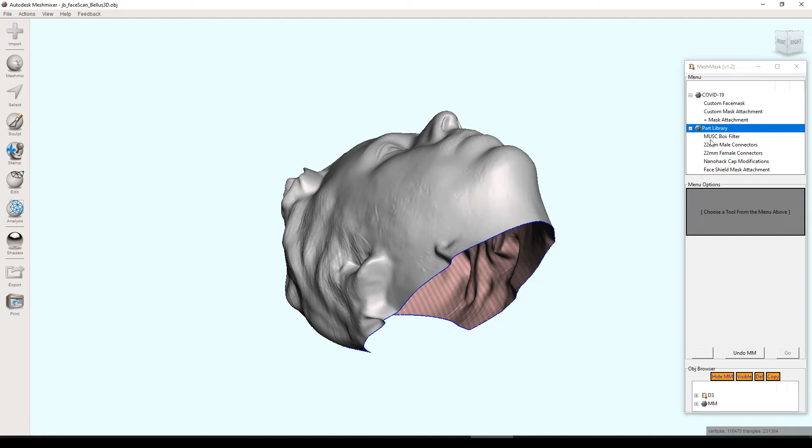For instance, MUSC, which I think is Medical University of South Carolina, released their own 3D printable filter design. Here's the PDF on it, which goes over how to put it all together, how it works, and why it works. I've also included that in the zip file. But when you're generating the mask, you only really need the attachment, you don't need all the other parts. So if you click on this, it will import the other parts.

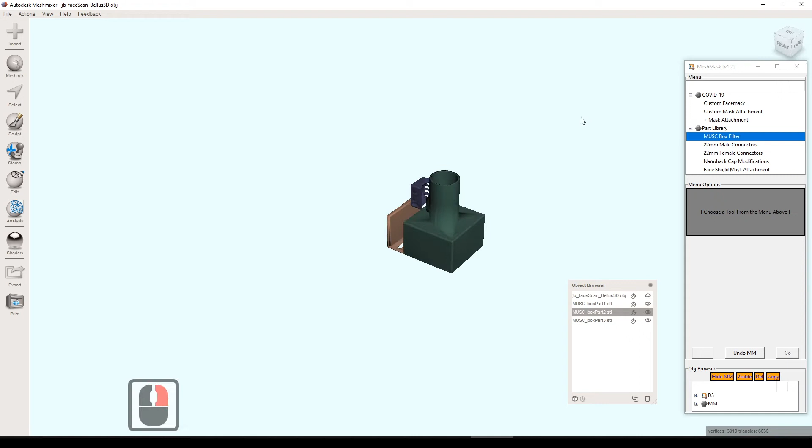So let's hide this guy. All the parts associated with the MUSC box filter, there are three of them, they all get imported, one, two, three, and you can print those out as well.

Same thing with, there was a request to add a 22 millimeter CPAP adapter, so we have male connectors. Let's hide these or get rid of them. If you click on the male connectors, it'll show you all the different male connectors included, and female, same thing.

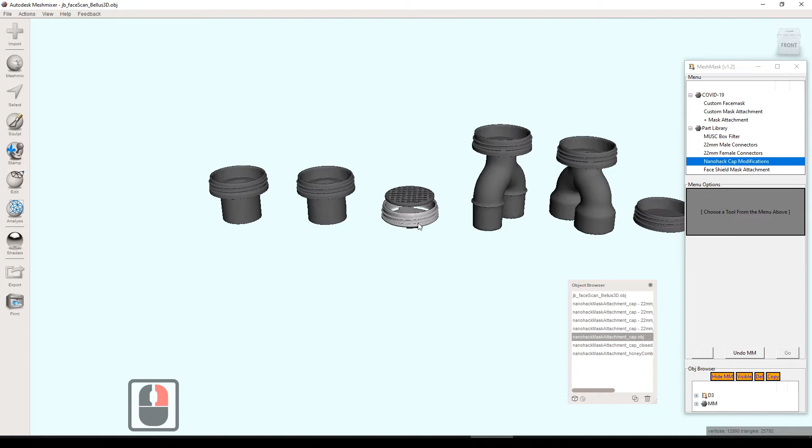NanoHack was the original one that was in the first version of Mesh Mask, but it only had... I think this is the original one right here. This came with a little honeycomb and it would screw into the mask. I got a little crazy with it, and thought that wasn't enough. So I realized quickly that this is fully modular and adaptable. It's got screws on it, it's threaded, so you can add anything you want to the opposite end of this threaded cap.

It's modular, you can add anything you want. So these are all the ones I just quickly hacked out here. Other than the original, there's a fully closed end cap, just in case you have multiple connections and maybe you thought you'd use one, but you're not. You can close that off with this end cap. This one has a little cutout for the MUSC box adapter.

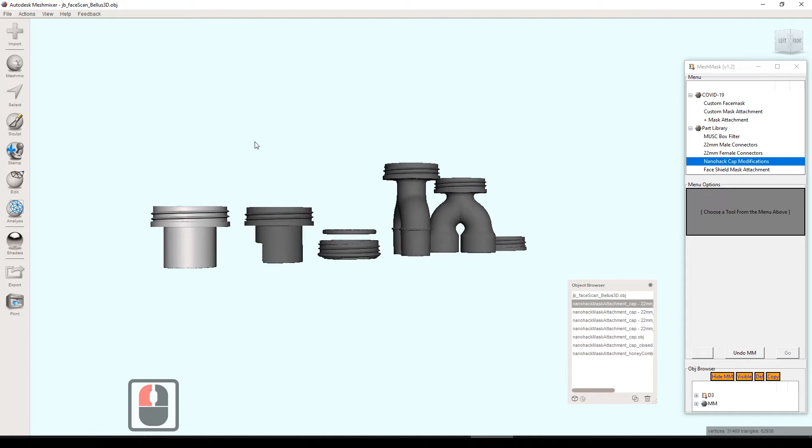That's just a regular 22 female. And that's basically it. At the end of when you're generating the tool, if you go up here to add mask attachment, and you chose the NanoHack, it would import all of these automatically at the very end, just to show all the things you could use with the filter you chose to add to your mask. These get added automatically at the end of the mask attachment tool, but you can also access them this way as well.

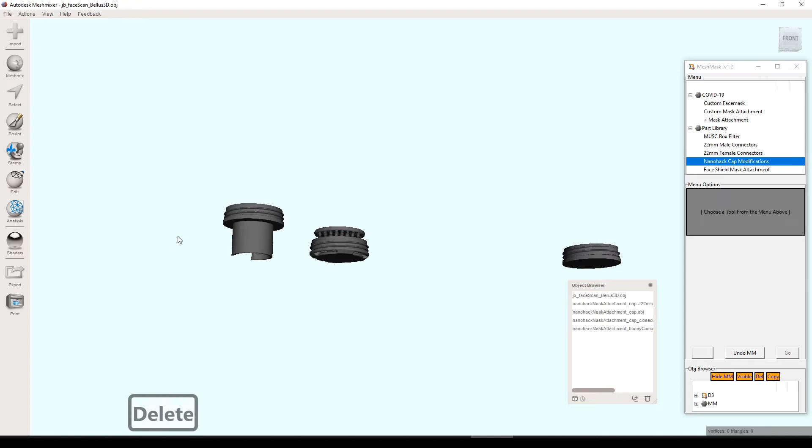At the end of when the tool is generated, you don't need all these, right? You're probably not going to use all of them. These are kind of silly, you may not need those, you can delete those. You may only need one of these, get rid of that. Then these are the ones that you 3D print. So it just includes all of them, and you can delete the ones you don't need and keep the ones that you do.

The last one is something I just made on my own. I saw there was a lot of talk about face shields and visors, and a lot of them go around your head, which is probably the more optimal solution. But I thought, why not give it a shot and include something that you can attach on the mask, doing it the reverse way, so the shield goes upwards from your mask instead of downwards from your forehead or head. I'll show how that works a little later, but for now that's what that does, and we'll get rid of that.

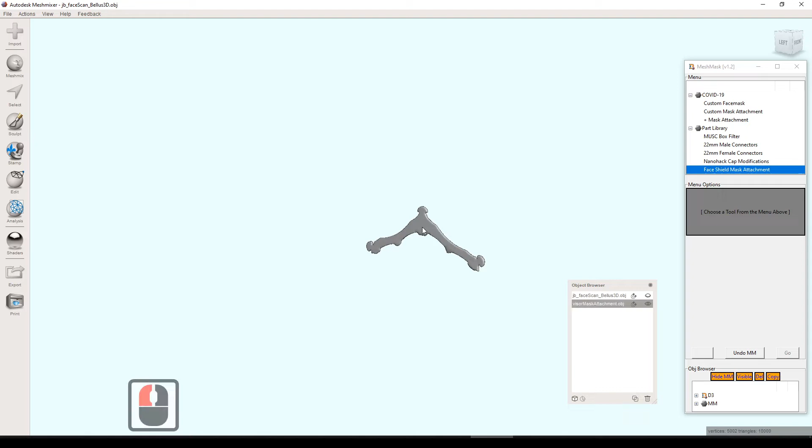We'll bring the scan back up and go back to custom face mask. This is the tool that will generate the custom face mask. Anything in this section are all tools, so any one you click on will generate some steps down here, and you iterate through them by hitting go, then next, next, next. Any directions for that particular step will be shown in this box. The first one we're doing is the custom face mask tool.

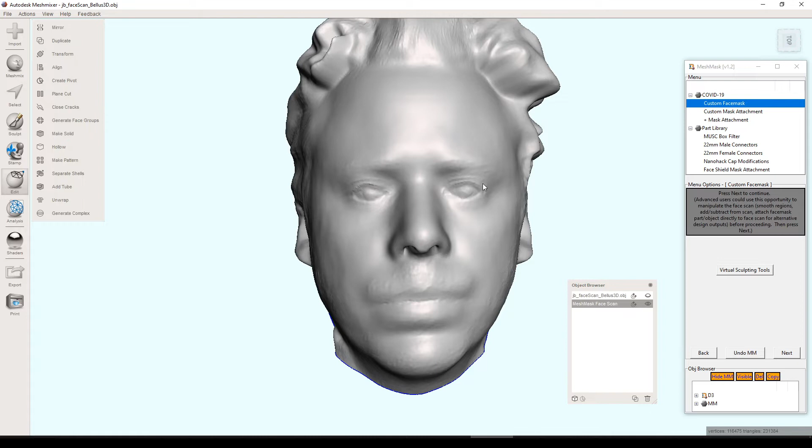The first thing is, if you want to make modifications to the face by sculpting, you can. It gives you a little brush to modify the scan if you want. I haven't really come up with reasons why I'd do that personally right now, but someone may, and just because I can't think of a reason, or I may not use it, doesn't mean I shouldn't have included it. There may be a case someone uses it for something, so I kept that step in. Most people won't, so you can just hit next.

The next series of steps is really just a bunch of waiting here, but the reality is it's normalizing any of the inputs it gets. So whether you took a scan with a Bellus, with a really fancy 3D scanner, or just with photogrammetry or a different piece of software on your phone, whatever you get, it will normalize that data into something this program can use consistently and generate a consistent output from.

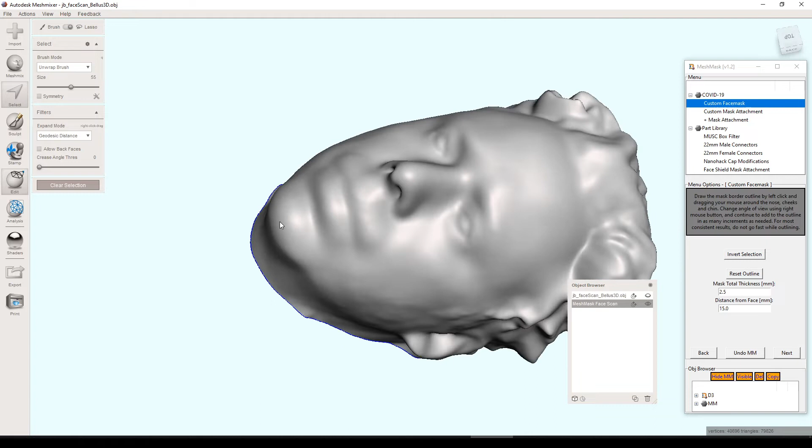Now it says draw the mask border, and the tool that's automatically selected allows you to just left click and draw on the face directly. You can continue the line, and if you mess up, let's say you came down here and you don't want to, you can come back here a little bit, re-click and drag, and it'll fix that.

In the prior video, I showed that you can change this to brush, and it gives you this kind of little circular brush that you can actually paint onto the face. I feel like this is a little bit better suited for what we're going to be doing, so I like to do that, but you could do either one.

The first thing is that I already 3D printed one of these masks, actually the one I did on the first video. It was pretty big and pretty bulky, and it's fine, it worked great, it fit nice, but it was a lot of material and a pretty long print, so for those reasons it's not really that practical.

What I learned right away is that these masks, if you're going to do it this way, they need to be as minimal as possible, so you don't use too much material, too much time, or waste too much money. That's one of the big benefits of using a 3D printer, you can generate these things fairly cheaply, so you want to keep it as small as possible.

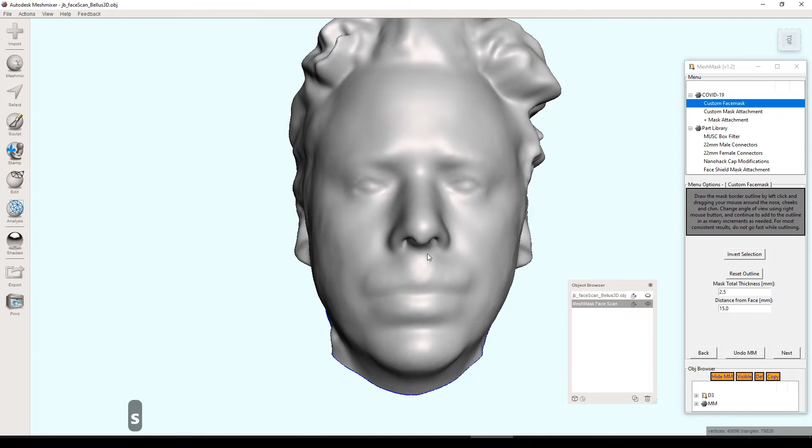What I like to do, my workflow for this, is only include at first what you absolutely need. The things I've determined you absolutely need are the nostrils, this part of the nose, and the mouth. So if I show you with my mouse, this area here is the mouth, and this area here is the nose, those are the absolute critical parts that need to be included.

So we'll start with the mouth, and I'm going to make this brush, this circle, a little bit bigger. You can come up here to the size and drag that up, or you can hit the open bracket key or the close bracket key, either one, and it will grow and shrink that for you. That's a little bit easier, and I like to do that.

I'm going to make it about the size of the mouth, just a little bit bigger, focusing on the mouth itself right now. That's too small, too small, too small. Getting there, almost right on, but we want a little bit of a buffer, maybe one buffer out, that will probably be good. I'm going to do one more just to be safe, focusing right on the mouth area. Click once.

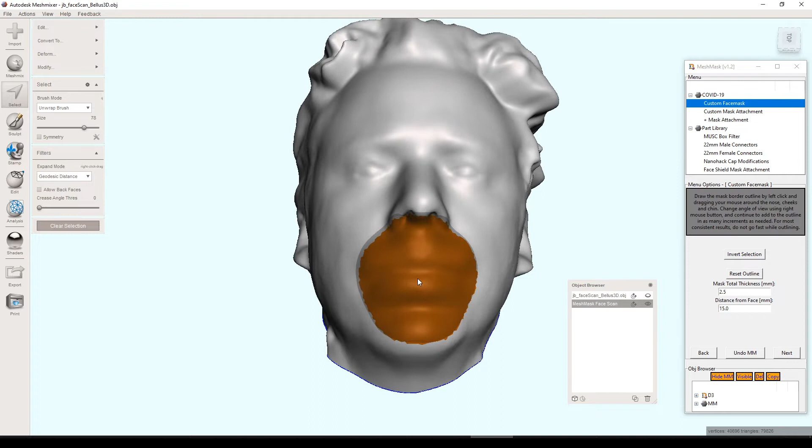Come up to the nose, and get my circle a little bit bigger there, and just get that first part of the nose that includes the nostrils, just that.

The other parts that I feel are important here, in order to maintain things, I feel like this may be good right here, but just to be safe, I feel it's good to add a little bit underneath the chin and a little bit on the bridge of the nose to get a little more mechanical retention on the face mask, so it's a little easier for it to stay on. So I'm going to do a little bit under the chin as well.

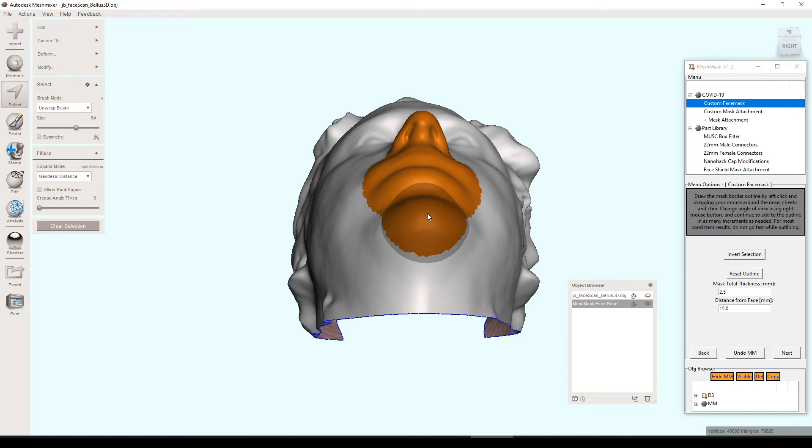Not too much, just enough, we don't want it on the jawbone, necessarily like right on the jawbone, so maybe the border is just a little bit underneath that. That might even be too much, but that's fine.

Then we'll come up to the bridge of the nose, and this is dependent on who this is for. This specifically for me is going to be for a dentist, and I know he has loupes on or glasses, so I can't have this right up too high because then he couldn't wear his loupes. Or you could make an attachment for the mask that has loupes built in somehow, but just using that as a consideration, I'm not going to bring this up that far.

Let's see, I'm going to shrink that down, and if you look at it from the side, I think that's a better way to judge things. Your glasses will typically rest maybe from right in the middle here, in this area, so I would say you want the mask to go in between maybe the midpoint here and the tip of the nose, somewhere in between there. So maybe right there.

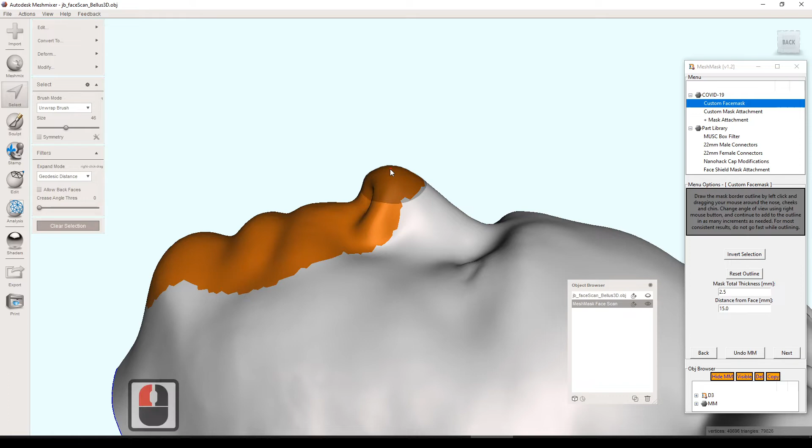The next thing is that you need to make sure that the outer side of the nostril is also selected. You want to make sure everything around it, a little buffer around the nostril as well, is included. When you exhale, your nostril flares out a little bit and needs some room to move around. So make sure the full border is selected with a little bit of a buffer.

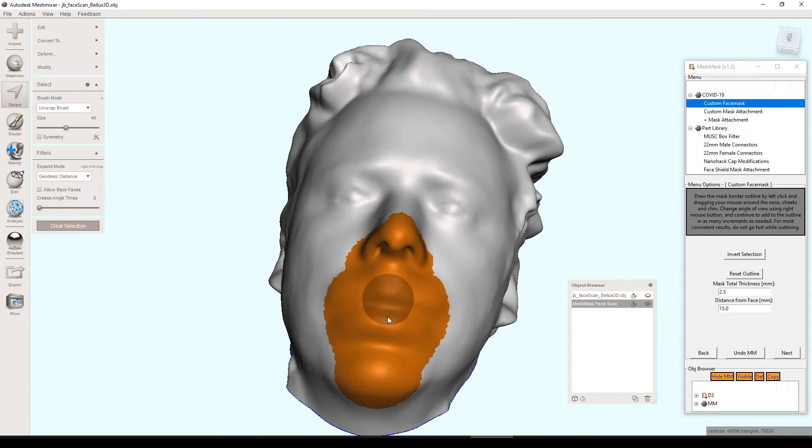Okay, now that we have the essentials selected, we can modify this a little bit. The first thing I saw is that this area here is kind of a crease in the face, and it's going to be moving around when you talk and move. So I need to make sure a little border outside of that is selected as well. That looks good on this side, and on this side that looks pretty good too, maybe just a touch there. Mouth looks good, nostrils look good, bridge of the nose looks good.

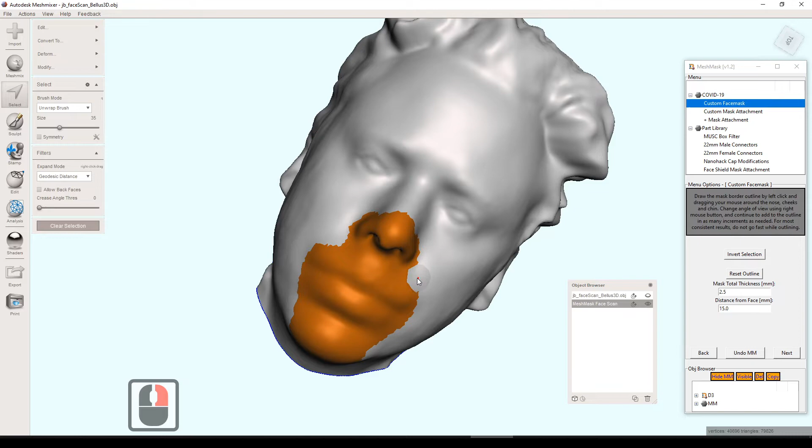I don't think I need this extra bit out here. Again, we're trying to minimize, so this is actually pretty important — each little bit that I'm removing here is saving me quite a bit of material in the end print. Buffer of the nostril, but minimizing a little bit of material. And then do I really need this part? Okay, it's looking efficient.

Then we come over here to our parameters. The total thickness of the mask, the end mask to be printed — I have the default value at 2.5 millimeters. I think that's a pretty solid thickness. Depending on what you're using, you can change that, but I'm going to keep it at 2.5.

Distance from face, the default value I had at 20 millimeters, but like I said, when I printed my first one out it was pretty bulky, pretty big, took quite a long time, and there was sufficient room in there — so 20 millimeters was a lot. I think 15 is a good spot to be at, and you can even go less. Again, we're trying to minimize as much as we can as far as material goes. For each millimeter or 2-3 millimeters extra that you add to the length, it's that much more material. So you want that perfect balance — enough room within the mask, but not too much material, or the mask may be too big to even print on your 3D printer. So 12.5, I'm going to give that a shot. I think that's good — 12.5, 15, anywhere in there is a good distance. This looks good, and I'm just going to hit next.

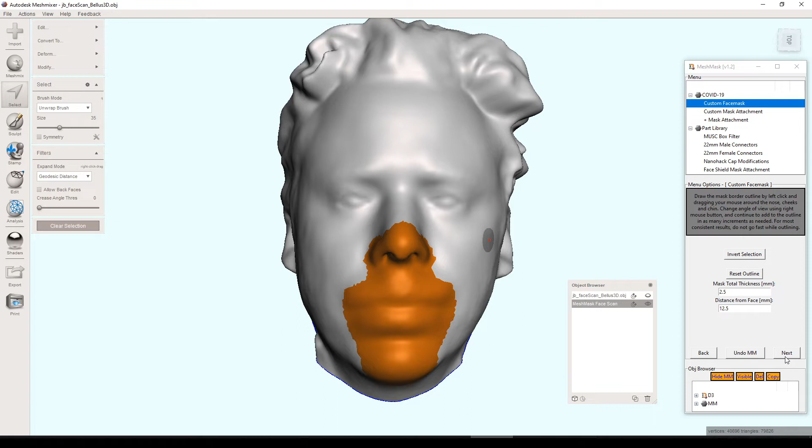This is a new step that I've added in this most recent release of the software. You are now able to add a gasket that goes around the border of the mask, which can either be fused to the mask so it's all one piece that you 3D print just like that, or you can make it removable as a separate 3D print. I did that just in case — what I'm personally going to do is use a flexible or softer material for that print and then attach it to the mask printed in a more solid material. So you can have it fused if you want, or check an option later that says to make it removable, and it will be a separate 3D print with an offset that's a good tolerance for snap-fit parts in 3D printing.

So we are going to include that gasket — we're going to check that box. We can make it whatever diameter we want. I haven't printed one of these out yet, so I'm not quite sure, but I'm going to do 6. I think that's a fair value — it looks good aesthetically in the software when it's done. I think anywhere between maybe 5 and 10 would probably be a good value, but I'm going to do 6. Hit next.

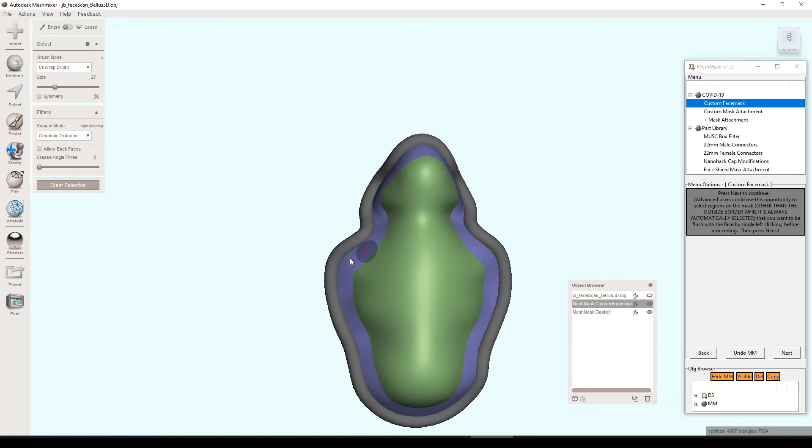This step says, and I'm actually going to pay a little bit more attention to this step. There's a lot of text here, but the reality is all it's asking you to do is select any other area other than this purple border that you want to be flush with the face.

So for me, this is going to be for a dentist. We already made enough room on the bridge of his nose for his loupes or glasses, but at the same time, this part of the mask will extrude upwards 12.5 millimeters. And if you did 15 or 20, that's quite the distance there, and if you're looking down at a patient, that may hinder your ability to see things properly.

So I'm actually going to try to reduce that a little bit, and I don't want that to extrude out and have that same 12.5 offset. I want it flush against the bridge of his nose.

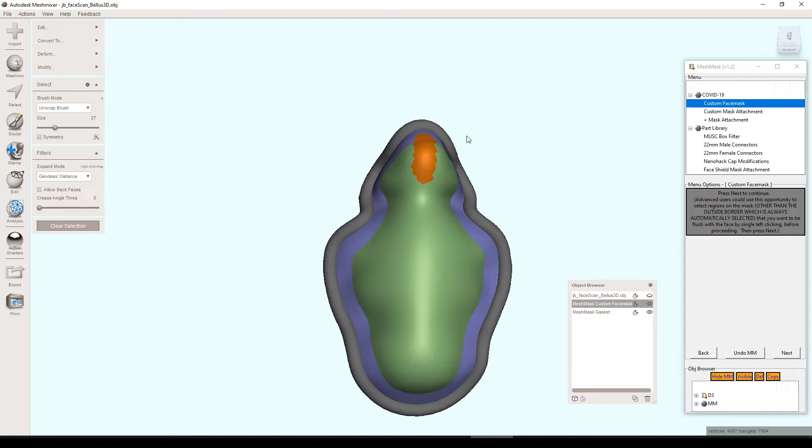But I can still see the nostrils here, the outline of the nostrils. What I do not want to do is include the nostrils in this, because that would mean it would be flush against the nostril with limited room to expand when you exhale and things like that. So I can still kind of make out where the nostril border is, so I'm just going to go right around that.

This helps with material, and it helps with vision as well. So I don't have to do any of this purple part because it's automatically selected, just anything in the green. And if it spills into the purple, it's fine. But let's make that a bit more symmetrical.

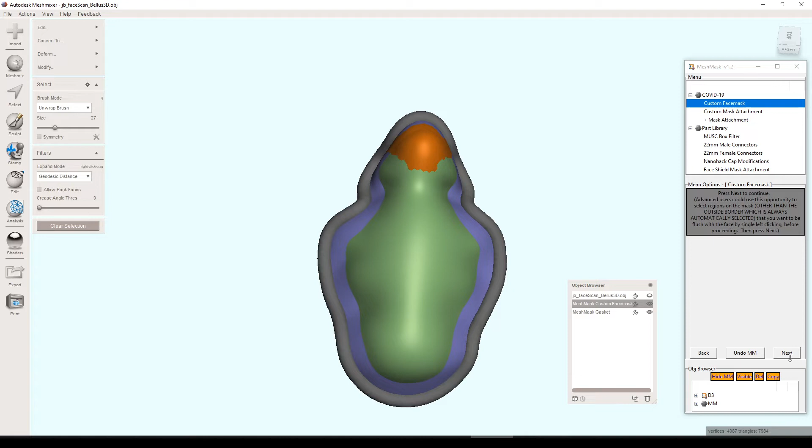Okay, that looks good. That part is going to be included. We're going to hit next.

Again, I'm not clicking on anything or doing anything. It's just doing all these steps automatically.

Just taking that shell that we had and then making it the distance away from the face that you specified, and then creating the thickness that you indicated as well, with a little bit of smoothing and things like that. Just a little, not much, just a little bit to kind of round the edges off, because I didn't want to alter the geometry too much, because I wanted it to be a custom fit thing. So too much smoothing can make you lose the original accuracy.

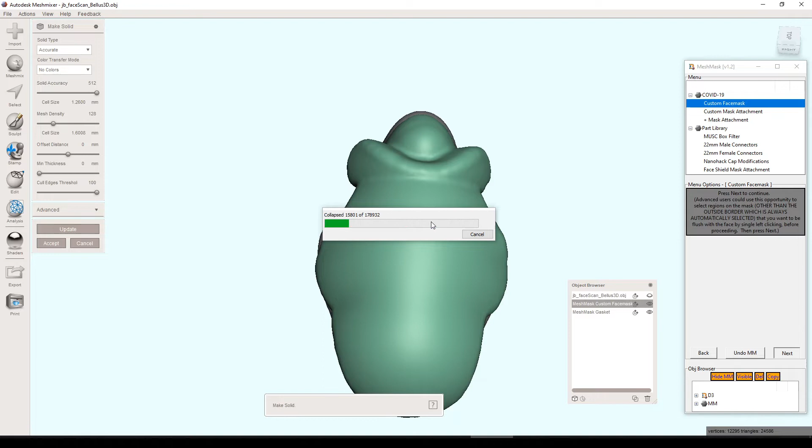Okay, so this is another new step, but that involves the gasket feature. It simply asks, would you like it fused or would you like it removable? Like I talked about earlier. In our case, I'm planning on printing this in a softer, flexible material, so I'm going to make it removable.

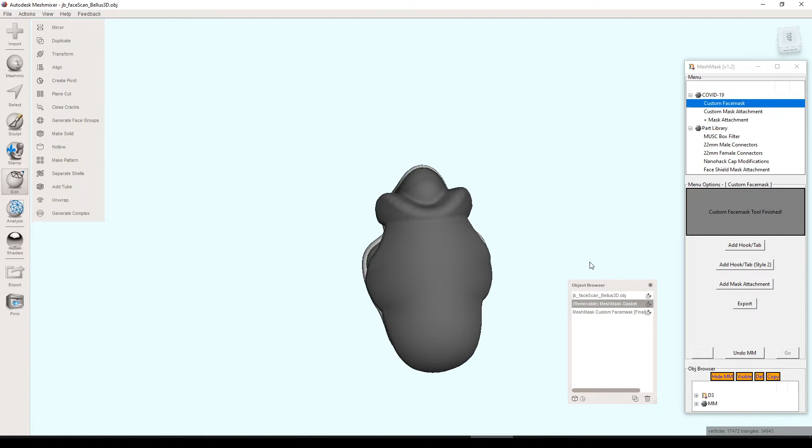What it's doing now is it's taking the mask that we've already generated and making an offset of that at 0.5 millimeters, and then doing a Boolean difference or subtracting it against that gasket. The reason I did 0.5 millimeters is because that's a fairly well documented tolerance for snap fit parts in 3D printing.

As you can see here, I'll try to zoom in a little bit. If you look all around, you can see there's a little gap. It's easier to see if I just bring this down.

And if this was in a flexible material, that should be fairly easy just to snap right on. Or you could just plane cut this literally in half, print two separate pieces, and add it to the mask in two pieces, which I think would be just maybe easier or just as easy.

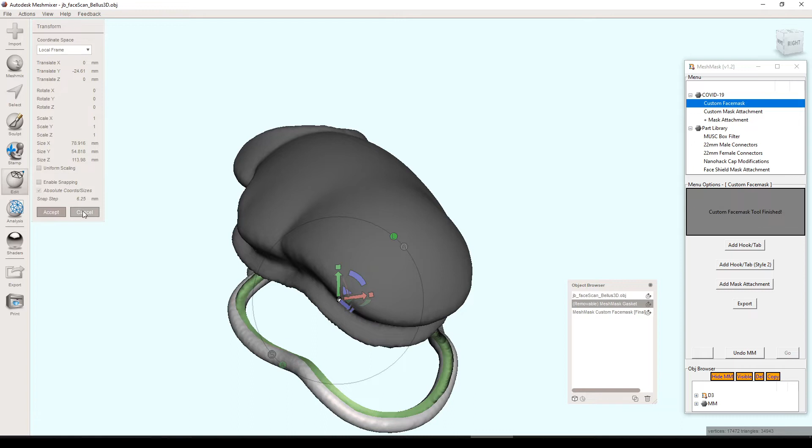So that's the removable gasket. If it were fused, it would look just like this, exactly the same, except you couldn't remove it or change its location from the mask.

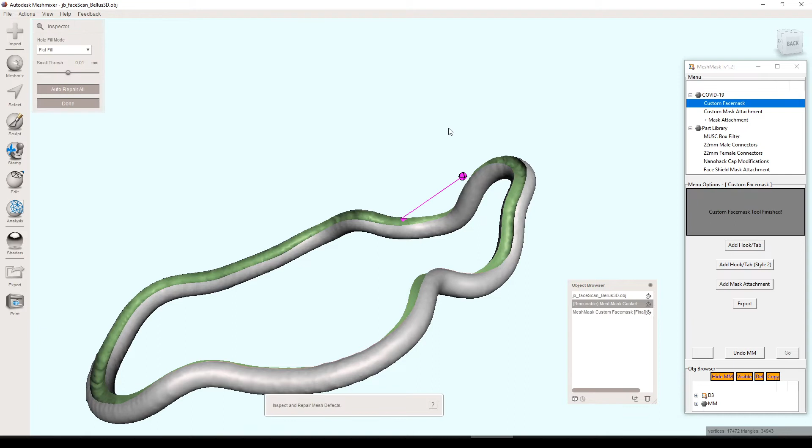So now we have the gasket removable, plus, ooh, looks like we have those little red dots indicating that there may be a hole or error in the file or in the mesh. So I see that. I'm going to hit I, that's inspector here, auto repair all. That fixes that. I've never had that happen actually, so that's interesting.

But if you do notice that, you can just hit the I on the keyboard, letter I, brings up inspector, auto repair all, done. Either way, we have our mask, we have our gasket, and we're going to move on to the next step here. We had at first one style of hook. Now we have two different styles, so I'm going to use the second style for this one. I'm also going to bring the face up here, just for reference.

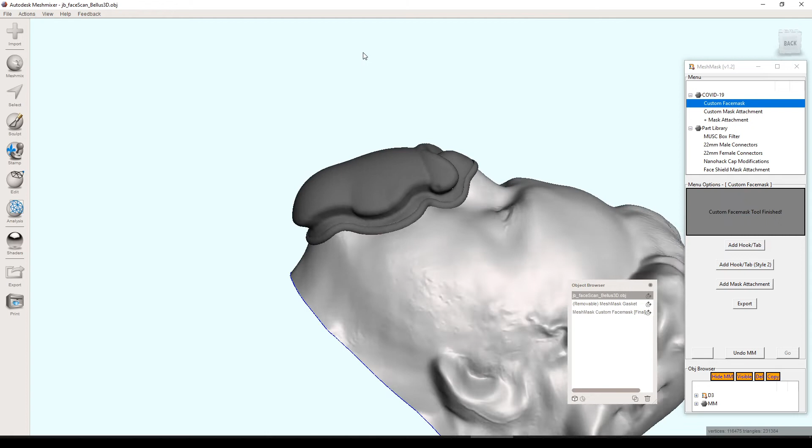Because these hooks and tabs are going to be where you can put elastic bands that will attach to your ear or the back of your head. For him, I'm suggesting it goes around his ear. So I'm going to try to angle these so they go towards the upper part and the lower part of his ear. Let's put one at the top of the mask here, maybe right here, and then add a hook.

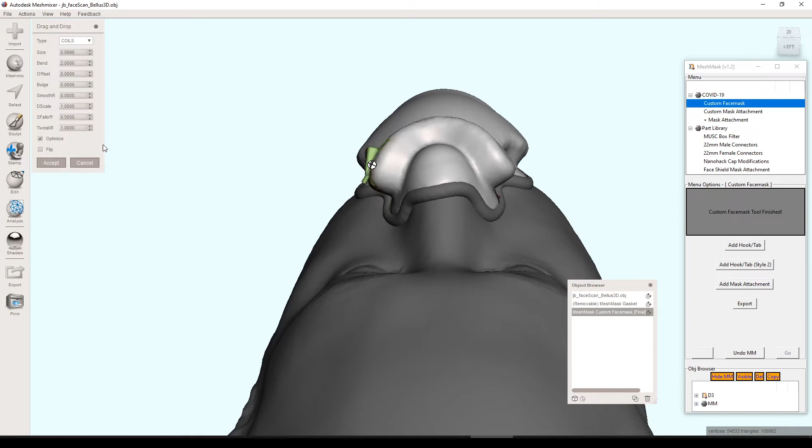I'm going to hit optimize here. You don't have to - the difference is that it sticks out a little bit, which is fine. If it's optimized, it's more flush. For me, I want this one a little bit more flush.

And I want to rotate this so it's headed towards - let's see, if I drew a line out, it kind of goes towards the top of his ear. Maybe even inwards a little bit. Make this a little bit bigger. And that's looking pretty good there. Out of the way.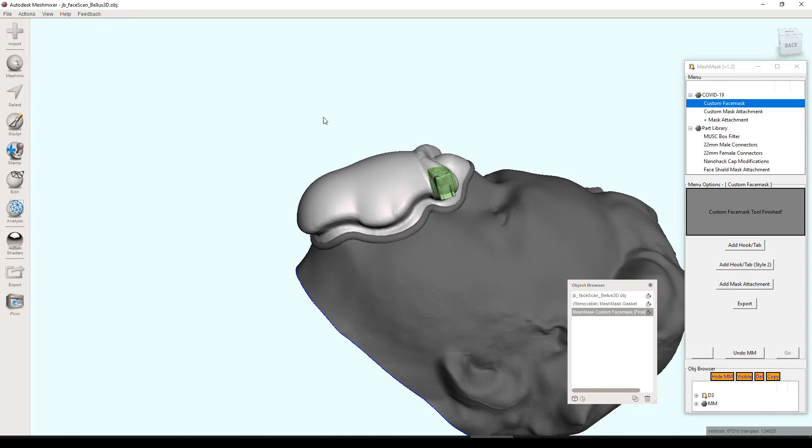I'm going to remember this size here because I'm going to add 3 more. I want them all to be the same size, so I'll Control-C copy, or just remember that number. Accept. I hit S to open the select tool again, or you can just click here.

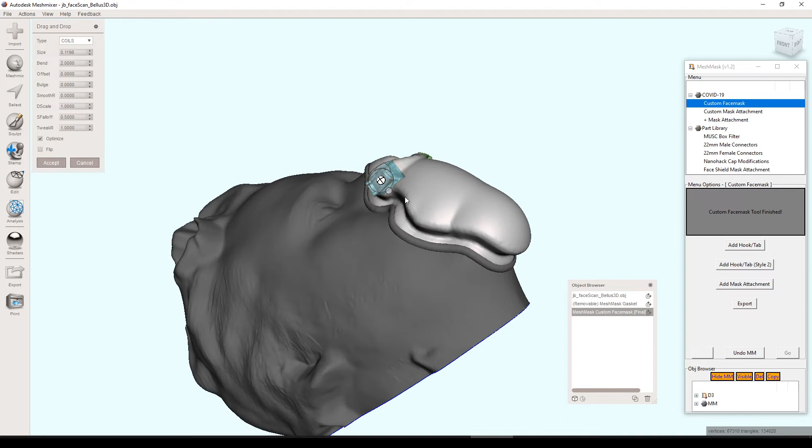Same thing over here. Paste it to get the size, optimize, and then I just need to angle it at the ear, kind of get it more on that flat part there. S, and I'll try to put one down at the bottom here, like right there.

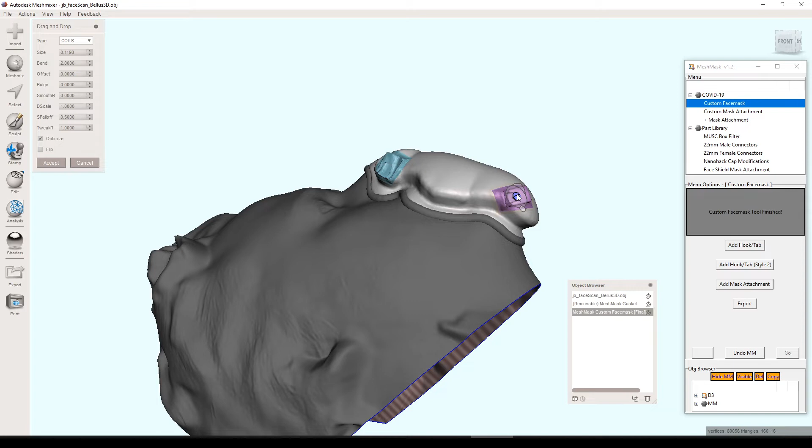This one's a little bit trickier to visualize, but I kind of want to just aim it right at the bottom of his ear. Looks pretty good.

Is it really that obtrusive? A little bit - I'm going to bring it down more, kind of in this area. And then check that angle again. I think I need to bring it down just a little bit. Okay, that one looks good, accept.

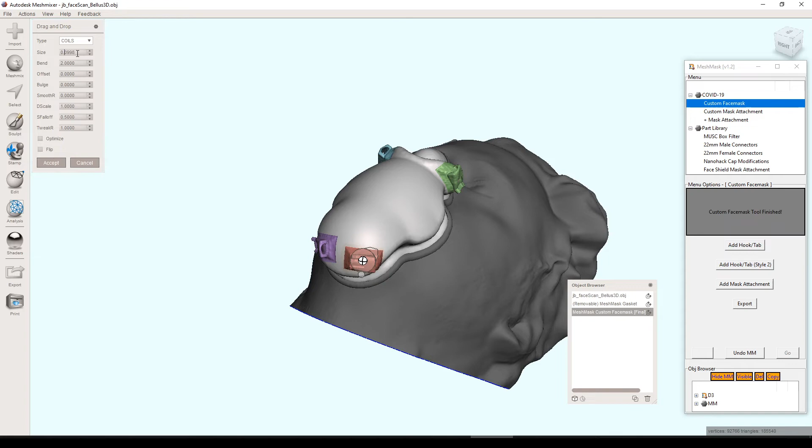Last one. Paste that size, optimize it so it's all the same. I think I'm just going to see if I can line it up based on the other one and then check it. That looks good.

We'll do that inspector trick again. So everything looks good, but I'll do auto repair anyway. It looks good.

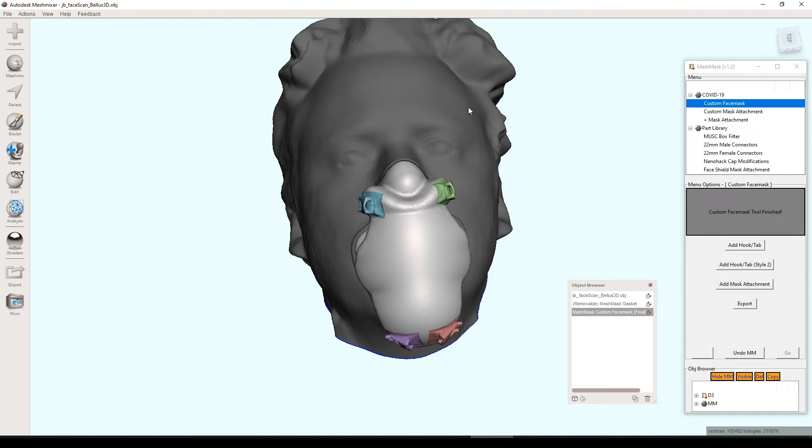Okay, so we have the mask with the 4 elastic attachments, or attachments for the elastic bands. I'm actually going to hide the face for this next part, where we add our mask attachments. So you got to make sure that you have your mask selected for this tool, which it says right here, then press go.

It starts by making a copy of the original mask, actually, if you notice down here. So if you make any mistakes in this part, or something fails or goes wrong, you can just start over because the original one's right here.

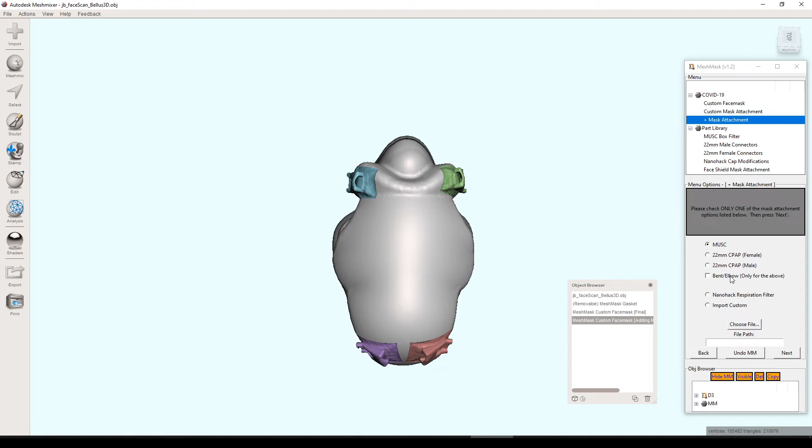So what we want, or for my friend here, I think I want to do the MUSC. I want to do 1 port for that, so I'm going to do an MUSC. I could do a bent elbow, but I think that's a little bulky for me right now, so I'm just going to do the straight piece. Some other options are right here, this bent elbow check mark - it only applies for these 3 options. We'll get to the custom later, but MUSC for now, and next.

Now it's asking us to select where we want this attachment to be placed. Again, I'm taking things into consideration like line of sight. He's going to be looking down into a patient's mouth. I can't have this big box attachment right in the middle of his face - you couldn't see anything, so it needs to be out of the way. Preferably off to the side or down at the bottom. Maybe not down at the bottom - that might get in the way because he's going to be leaning his head down. So probably off to the side makes the most sense.

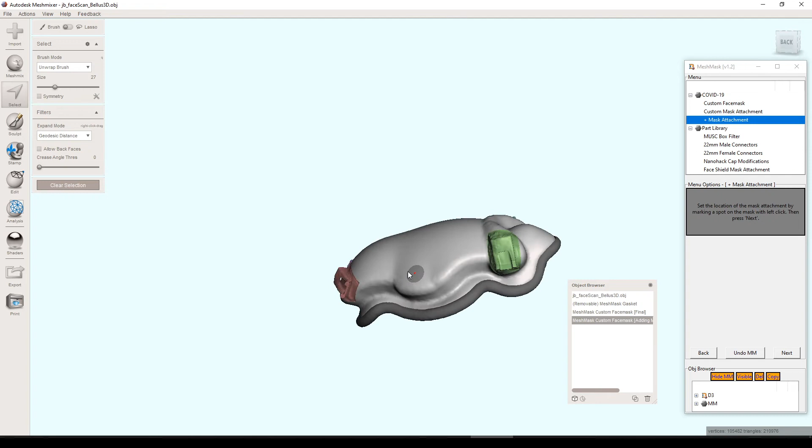So I'll say, try to make it... let's see.

That looks good. And if I'm going to make a second one, I'll just... well, no. So all we need to do is just click one spot where we want this attachment to be.

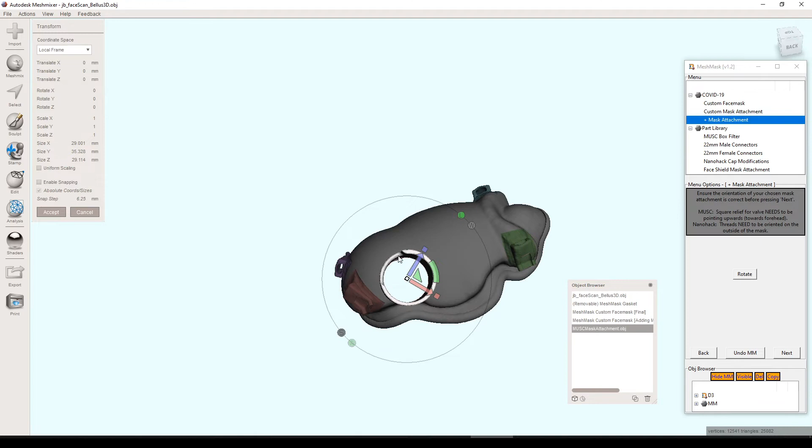Next. This creates the perforation for us and adds the attachment to the location. For the MUSC file, you need to make sure that this little cutout, this window, is facing upwards towards the nose, towards the head region, because it has a valve on it and it needs to be facing upwards.

So we'll do that. I'm going to have to adjust this a little bit too, but let's just do the rotation for now. If I was looking at it from his point of view, yep, that looks good. But then we need to adjust its depth, because I saw there was a little hole right here. We can't have that, so this needs to be adjusted down a little bit.

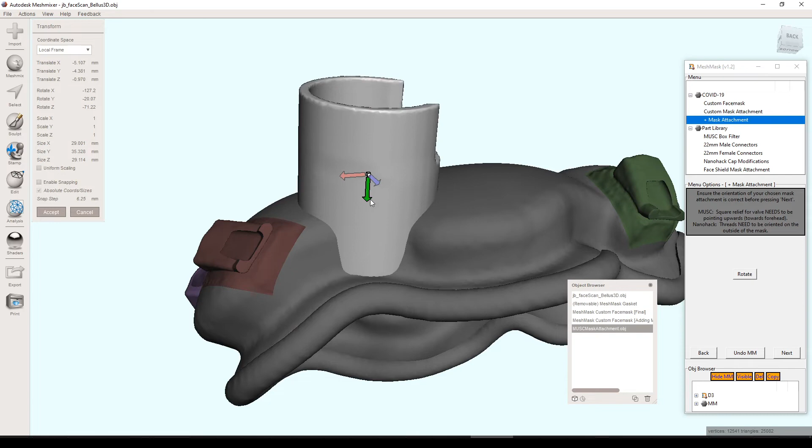That looks like a lot protruding in here, but I think it's just because of where I selected, right on this side of the mask, but that's where I want it, and I think I'm okay with that right there. And we're going to say next.

And we'll fuse this part to the mask. It's always good to double check all the way around the perimeter of this attachment just to make sure there's no gaps. Looks good.

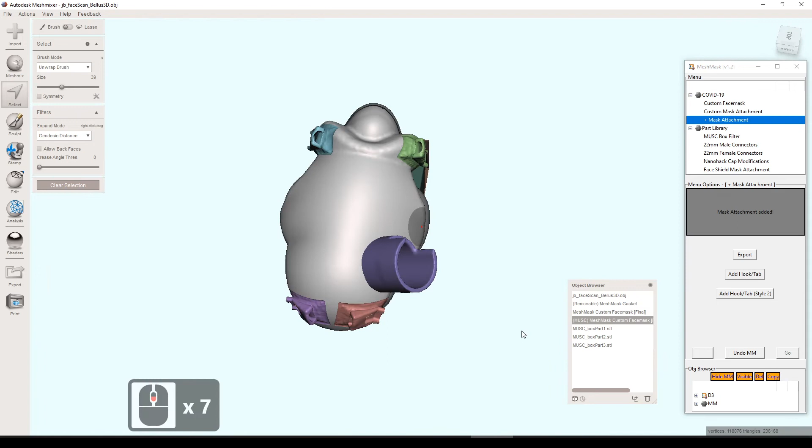You'll notice the parts for that particular attachment, the MUSC files, were automatically added at the end of that tool, so you can have those ready to 3D print. That'll go off to one side here. I think on the other side, what I'm going to do is... not this, actually, I will.

I'm going to do the same exact adapter, and I'll show you why towards the end of this video, mainly because there's a new type of filter that I haven't integrated in the software, based on a Roomba HEPA filter cartridge system. There's an attachment that fits this exact port here, this exact one. So the Roomba part fits this perfectly, there's no need to integrate anything. It's the exact same.

So that's wonderful that whoever did that did it this way. I think anybody developing parts like this now and in the immediate future should really take that into consideration. It makes things more universal and more adaptable. So I love what that person did.

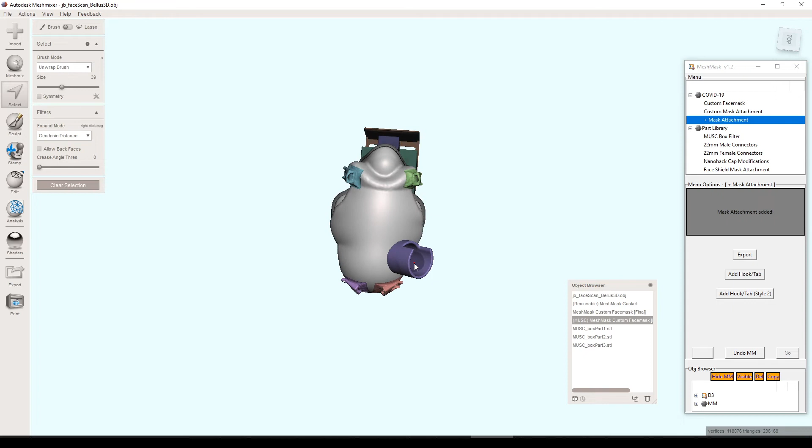For that reason, I'm going to put exactly one more of these on this side. The thought is, the reason you might need two is that you may need more, since just one may not give you enough airflow. Having two would give you sufficient airflow. If it turns out that one's fine, you can always just plug this one up. So it never really hurts to include a second port, because you can always just plug it up.

So I'm going to do that on this side, at the exact opposite, and we're going to add another attachment. Just click on that same tool again. We have our mask that we want. We're going to go. Same thing.

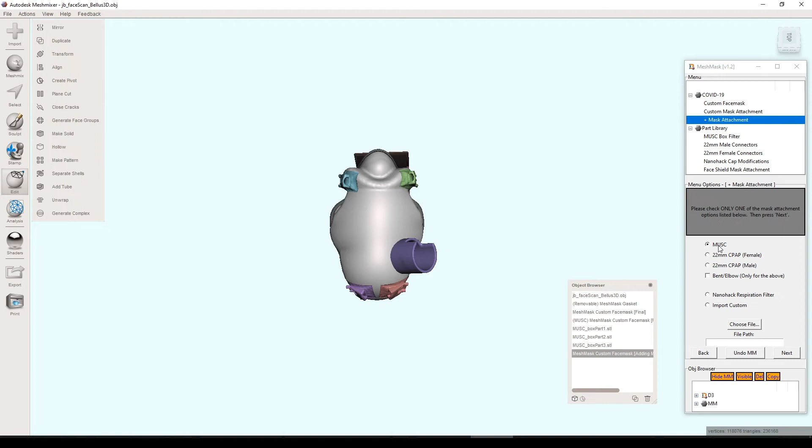Then it asks us where we want it, and we'll see if we can do it approximately in the same location as the other side, out of the way, non-intrusive, hopefully.

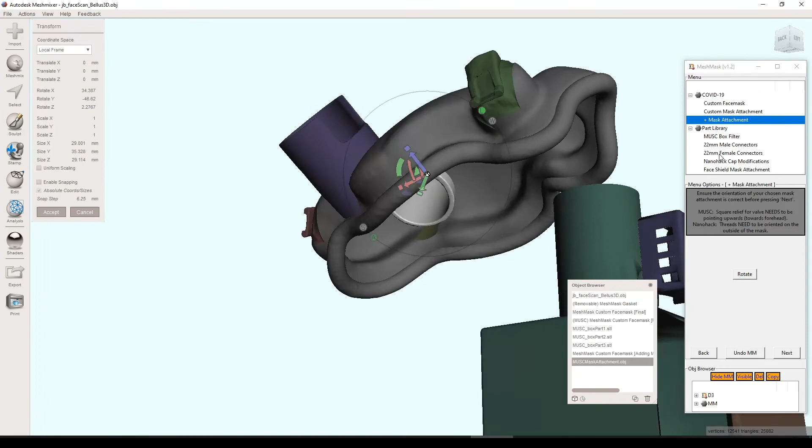Okay, we've got to make sure that cutout is facing upwards. That looks good. And that depth of how far that's coming in looks fine as well. So I'm just going to keep that like that and hit next.

Okay, so that is basically our final mask. It has the two — it imported two different sets, one for each one that you created. So for each port that you add through the tool, you add a set of these as well.

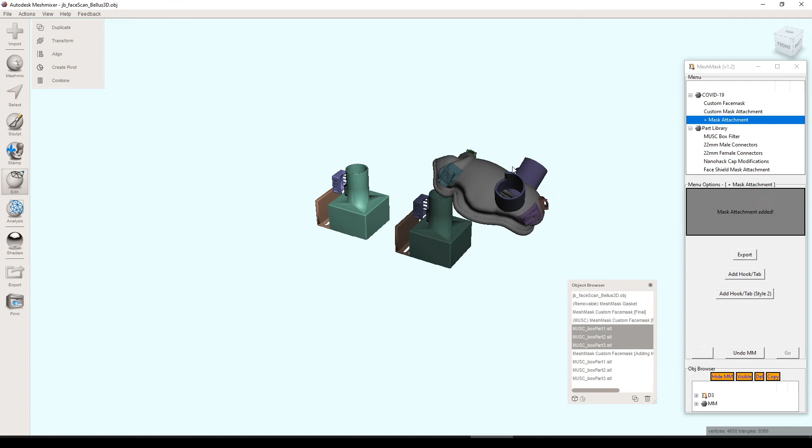However, like I said, maybe there's something that's not integrated within the software that's new, that you want to be able to attach to this mask — for instance, that Roomba filter. The reality is it actually comes with a 22mm male port that fits perfectly in here. It even has the tab that lines up exactly right as well. So you don't even really need to do anything except just do that.

However, let's just pretend as if that was not the case, and you did just want to directly add it to the mask. You want to create your own attachment — so if someone comes up with a brand new something and you want to add it to the mask, let's go through that workflow. That's what this new tool up here, Custom Mask Attachment, does.

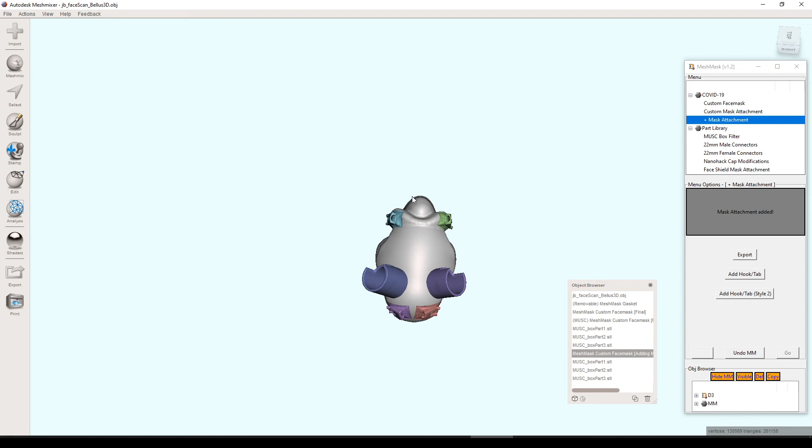So this is our mask that we have, the final version. Looks good to me. I will say that one is sticking out a little bit further, but I think that's irrelevant for right now.

We want to make that new attachment. The easiest way to do it, at least for me, what I did this morning, is I hopped on the internet, went to Thingiverse, and typed in Roomba mask filter.

For some reason this site is unbelievably slow for how big and popular of a website it is. And it's not just like, oh, right now it's bogged down. It's literally every time I've used it.

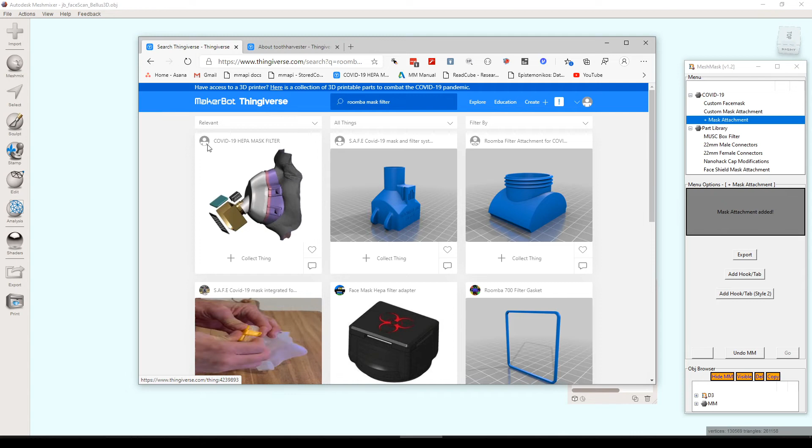There we go. So the first ones that come up are exactly what I'm looking for. This is one that I was using, or that I'm going to be using in this video. Just to shout this guy out, if you click on his profile, Wally Ren, I believe - I think it's Ren, either way, kudos and props to him. He's come out with an amazing set of files here.

So check this guy out. The best way to do it, I feel like - so like I said there was that one, you could just click on it and easily get to this file. But I noticed he released a few different ones, and one is newer than the other. This is the older one. So if you click on his profile, come up to designs, it'll show all the things he's put on Thingiverse. One of them is newer than the other. Just click on the newer one if you want to use that. They look the same to me. I'm not sure what's different, but either way, check this guy out. Make sure you leave a like and all that good stuff on his parts, because it's really cool what he's done.

It's taken forever, I don't know why. Oh, here are his parts that he did. Like I said, this is the one that I used, March 24th. For whatever reason, this one's newer, March 26th. So you can use whichever one you want. Make sure you like it. And yeah, that's it. I've already tried to tip him, and we can't - it says I'm sure he would love a tip, but they don't have it set up, so we're going to notify, say hey dude come on. Everybody else should do that too, because it's really cool what he did.

Let's see, we're going to navigate to where we were, files, and let's do - I'm not sure which one is more popular, which ones people are using, but they look about the same, so I'm just going to do that one right there, 700. There we have it, it's loaded in.

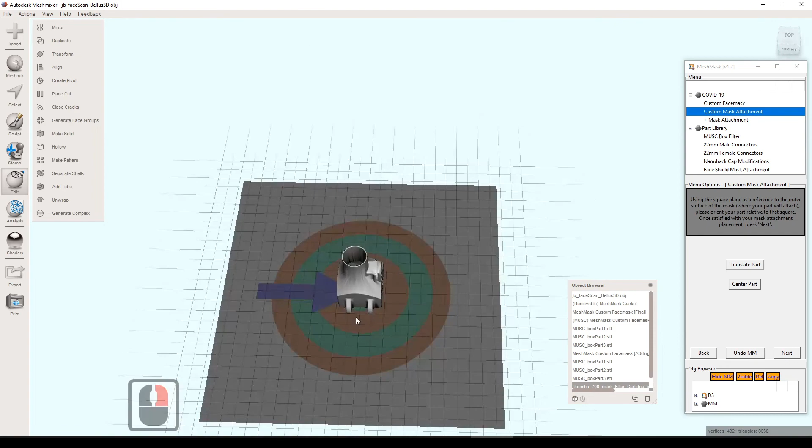And as long as it's active, we can hit go. It's going to hide everything else that's shown in the scene, and then kind of give you this target and ask you to align your part to the target as if this was the exterior outer surface of the mask. So align your part as if that was true. So we want this part facing downwards, try to put it on that X.

And that looks good. That's how we want it. And we can center our part as well. We'll do that.

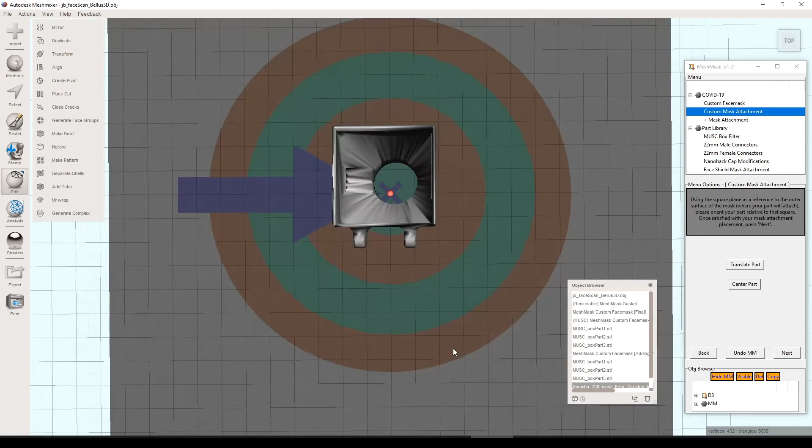The reason it looks off center now is because it uses a mathematical average of the size of the part, so it's not symmetrical. On this outer side there are these tabs, so the center of the part is actually slightly offset, which is why it gives us that. So I'm just going to manually align that. I don't think it matters either way, to be quite honest with you. But that's good, hit next.

Do we need a perforation or not? For this one, we do. Next.

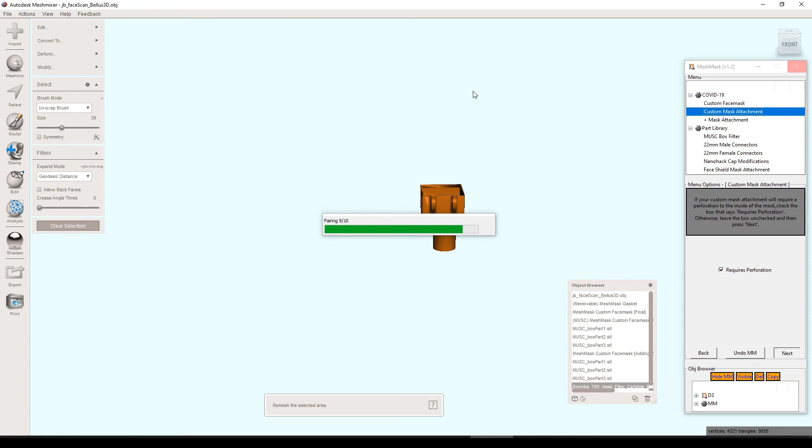Again, this seems like an unimportant step, but it's actually very important because all the different 3D files you can download on the internet come in different mesh sizes and regularities. In order for all these tools to work properly, it needs to be an exact or close to exact mesh density and triangle count. So when you download these parts from the internet, they're not that way.

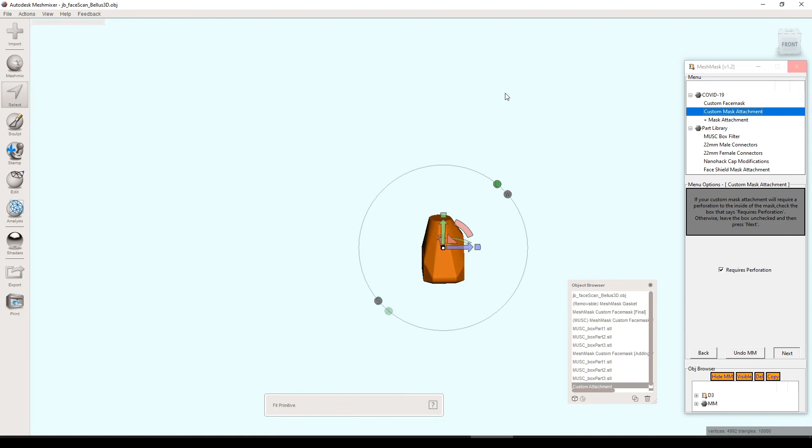What this is doing right now, just like with the 3D face scans, is normalizing everything to a certain mesh density, which allows it to work with the tools I already have in the software. So even though it seems like it's taking some time, if you know what these tools are and you're looking at them wondering why this is going on, that's why - it ensures a much higher rate of success for the tools working by doing it this way.

Some other things going on are that it's generating a Boolean object that will be used to create the perforation in the mask - that's what that little shell is there. It automatically generates all this. I'm just sitting here. The tool is finished.

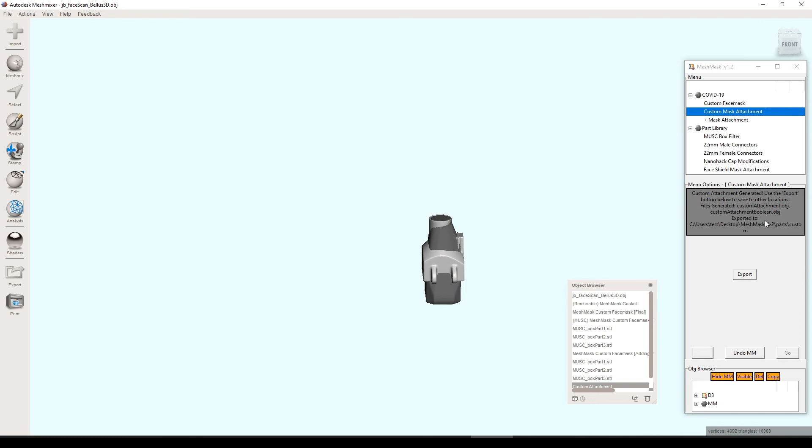You can hit the export button and export these to any location you want, but it automatically exports to your custom part folder in the software, so you don't have to worry about anything. You don't even have to click this button, but if you wanted to save it in a separate location as well, you could do that. For us, for now, we don't need either of these - we're done with them, they're saved in the proper location.

We're going to come back to our mask. Now we're going to add another mask attachment, but this time we're going to choose our own custom part that we just generated. We're going to come down to Import Custom.

I'm going to pick my file. It should default automatically to the correct directory, so you shouldn't need to look for anything at all. It's just right here, you can just hit Open.

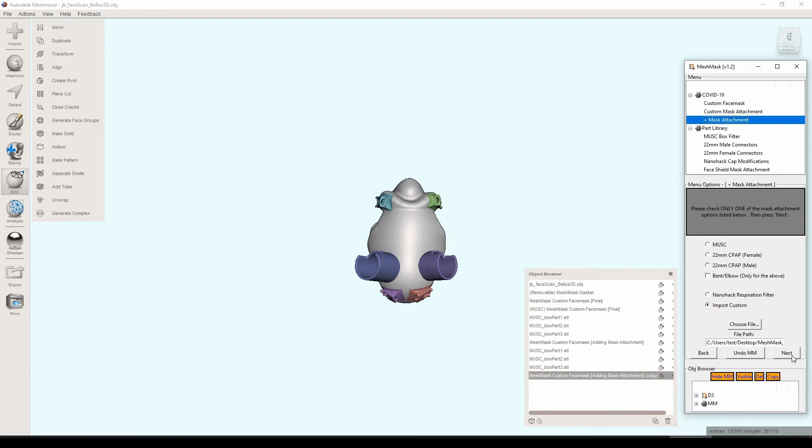One thing I should mention is that it will generate two different objects if you're doing a perforation - it will only generate one if you're not doing a perforation. The one you need to select is actually the non-Boolean one. So this guy, not the Boolean, but this guy. It's already pre-written here, so all you need to do is just click Open and it will work. Just a heads up. Then you can hit Next.

Same thing as before, we need to set the location. We'll just say right here.

I was just thinking to myself, why am I doing this to this mask? Because I'm actually going to be printing and using this, and I don't want this here. But the good thing is, like I said earlier, this made a copy of the input mask, so whatever happens here, I'm just going to delete it - this is mainly just to show you. But it's asking us to select somewhere that we want this attachment. We're going to say right there in the middle is fine.

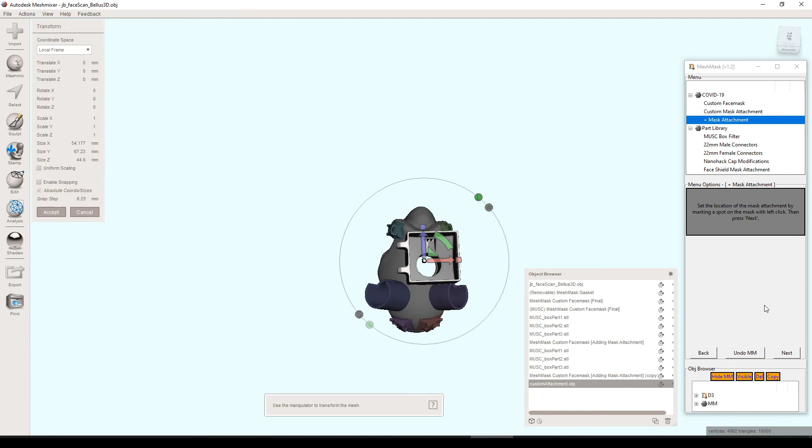Hit next - it imports the two parts that we made, does the Boolean difference, creates the perforation, just like in the other tools. Then it tells us, just like before, to get this in its best location here. So I'm going to check all the important things, like is there a seal all the way around? There's not, right here.

You're really only going to see that mainly with custom parts. Anything that's integrated, all of these things should match up fairly flawlessly. It should just be a matter of changing the depth if you need to at all. Even that should be taken care of automatically, but if you did, like on this guy over here, we did it at kind of a weird angle, so a little bit of it stuck out on the side here, so I had to bring it down further.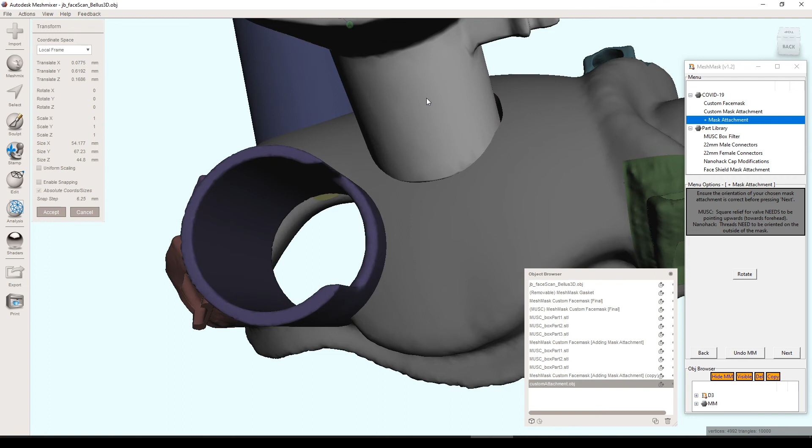Generally speaking, it will automatically work with the parts that are integrated. But for custom parts, if they're non-symmetrical, a little bit off-center, unfortunately you may have to slightly adjust that. I'm going to look on the underside to see what this looks like. Again, I see a gap over here, so I want to make sure I get that taken care of. I'm going to bring this down a little bit further.

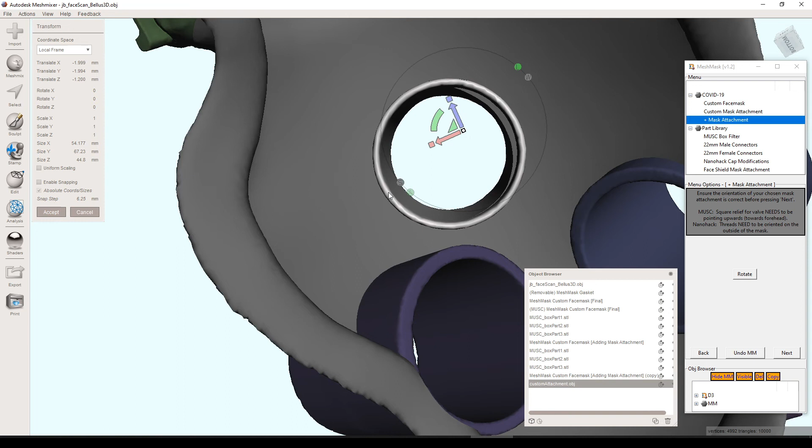So what I'm doing here is you can get it centered right in the middle, but in my experience, that may fail with the Boolean addition here, the union. So for me, just getting this left part right here, this edge of the hole, the perforation, this edge right here - if I can get that edge in the middle of this... see the edge, and now I don't, and I move it a little bit more, it's approximately right in the middle here. Even though there's a large overlap on this side, I know that it's a nice, solid mathematical Boolean. If it were right in the middle like this, I think the reason it fails is because there's a lot of areas that are just almost overlapping exactly the same, and it's just a challenge for the software to do that. So you just want a clean cut or a clean addition.

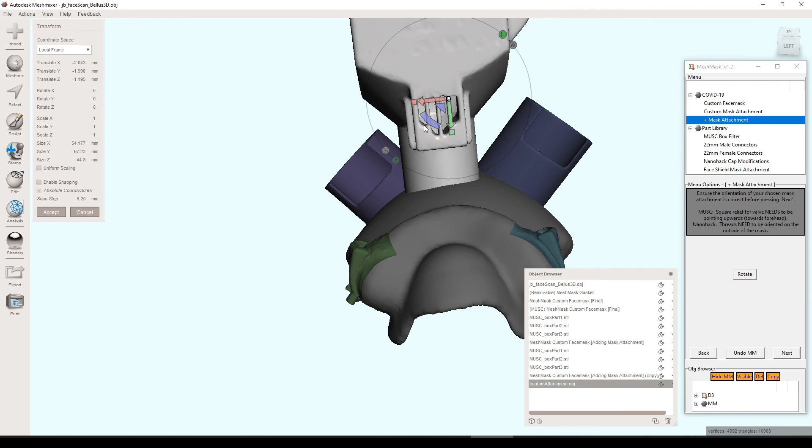So again, I'm just going to move that over. Check the borders to make sure all the seals are good. That looks good. We need to also make sure the rotation is right. And I think this one's actually good. This one doesn't have a valve on it, it doesn't look like. I haven't really experimented with this, I'm not quite sure, but assuming that needs to face upwards, that looks good.

You could rotate it a little bit. If you did rotate, you would have to change the X and Y direction as well a little bit, as you can tell there. But I think this looks good. Right here, depth looks good. Let's hit next. If we get an error, I'll show you how to fix that too.

Looks like we might be getting one actually. Nope, looks good. Sometimes it takes a little bit longer - that's a tell that you might be headed to trouble. And if it does fail, it's okay, you just need to adjust the part a little bit and retry the Boolean union again, and it should work.

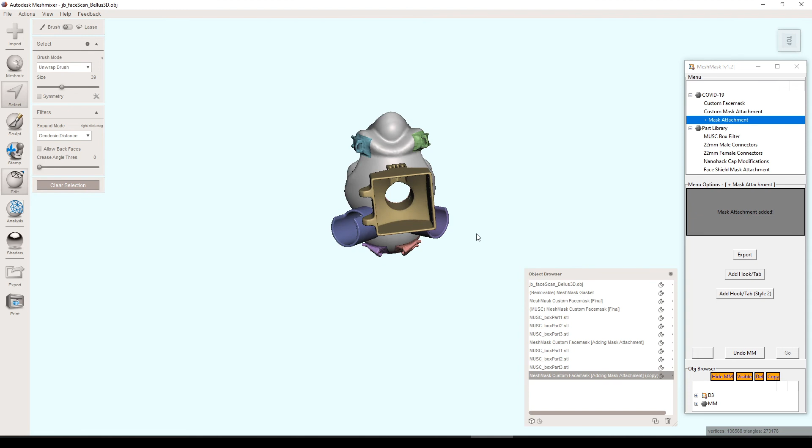There you have it, custom part. It's not integrated in the software by any means, just something I downloaded right off the internet. And there we have it attached directly to the mask.

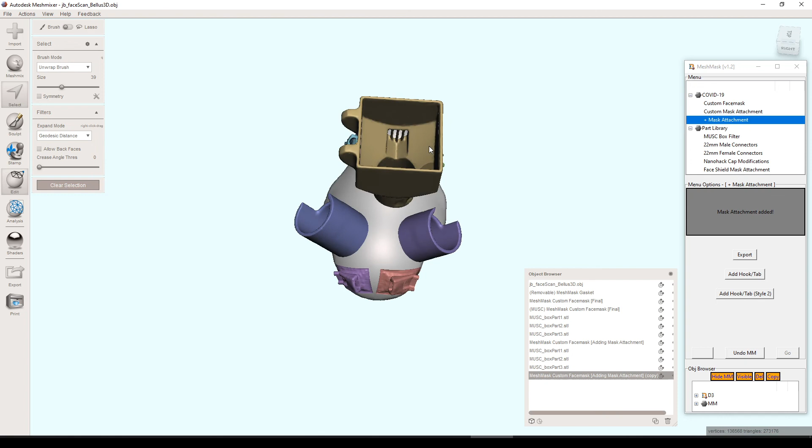That's cool, so it's kind of like, in a way, future-proof, because what was starting to happen is I get all these different things going, and I'm like, well, I'm doing the same thing over and over again, integrating these parts. I'm just going to take the generic way that I'm doing this and just automate it. And so it's almost as good as having it integrated. Couple little things are off, and that's only if your part is a little bit asymmetrical. But again, easy to fix, and that looks good. So there you have that.

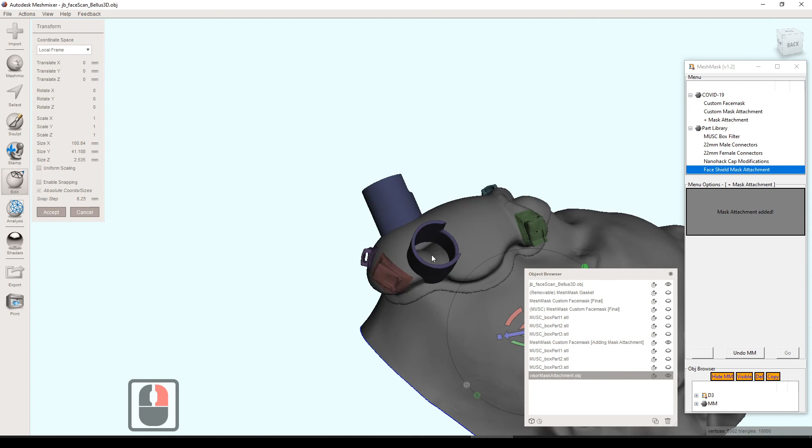But this isn't the one that I want to use. This is the guy. And the last thing I want to show you is how this reverse face shield works. So I'm going to bring up his face again, and I'm going to import this face shield mask attachment. It's kind of under his head. Click on it, and if I press the T button, it opens the transform tool, or I can go to edit, transform. I'm just going to bring this up into view and a little bit onto the mask.

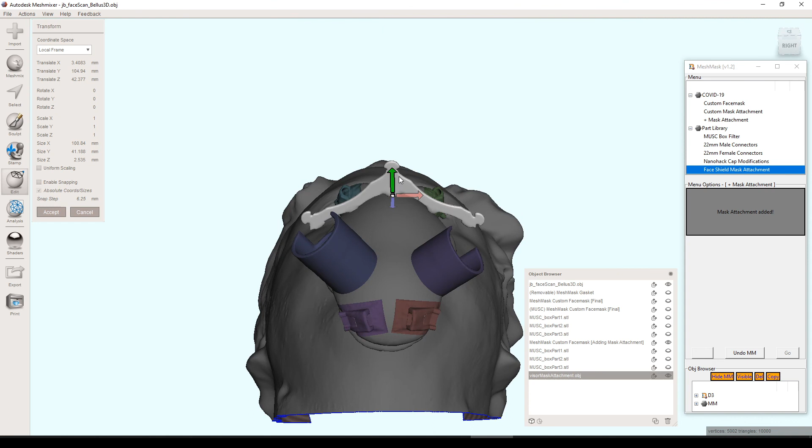So I'm just going to kind of get it centered first. These little protrusions right here, here, and here are where you would attach the bottom portion of the face shield to, just little holes that this would snap onto. These need to be far enough out where it goes further than the distance of the width of his eyes, and that looks like it's just beyond, which is perfect. I want this to be directly attached to the mask, so I'm going to kind of bring it in like that.

The next consideration here is to get the angle of this right. If you had this facing up like that, the face shield would just be going straight this way. Looking at his eyes and knowing he's going to have loupes or glasses on, I think I'm going to need this out a little bit further, as far as I can, I guess. And maybe I can even bring this up a little bit further like that.

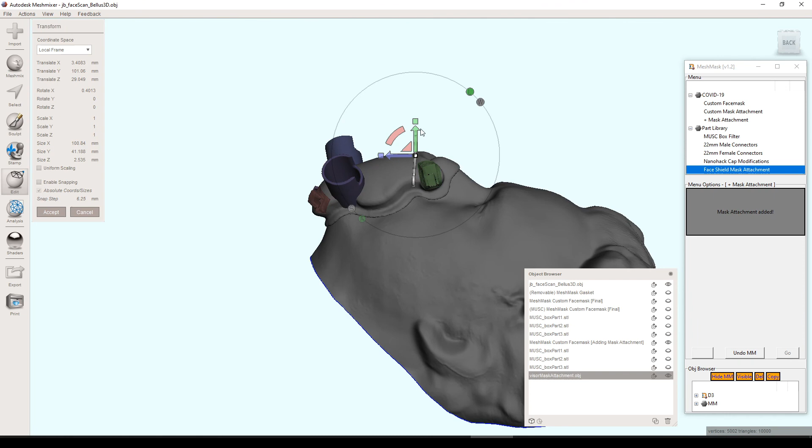So again, that kind of still looks like... well, that might be good actually. And checking the width again, I'm going to bring that over just slightly. Okay.

And this is how you can manually add something to a mask. But before I do that, I want to check the underside, so I'm going to get rid of his face, hide it, come back to here and look at the underside. Oh, that looks fine.

Okay, so if we want to add these two things together, you click on one. Either one, you can click on this one first or this one first. Once that's clicked, you hold Shift down on the keyboard and click the other one. You can see these got selected down here. You can do that same thing, except you press Control if you're doing it through the object browser. Now I have them both selected here, but I think it's just intuitively easier to click on the object, hold Shift, and click on the other object.

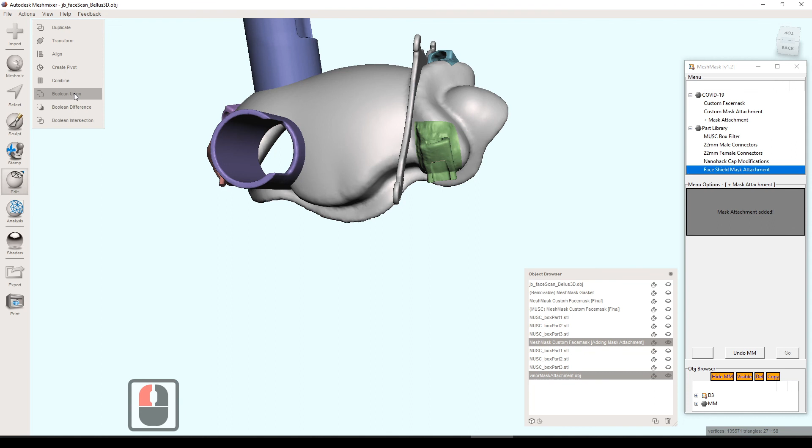Once you've done that, Boolean Union, accept, and that will be it. That will be the final mask for my buddy in North Carolina.

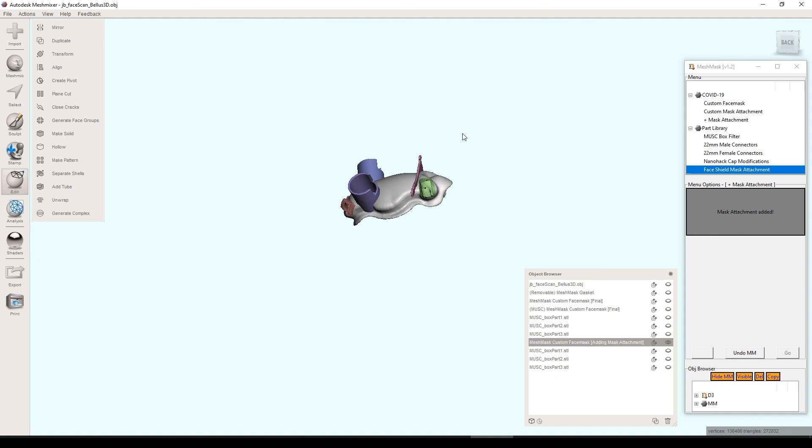Once I print this out and deliver it to him, I'll have him send some pictures and give me some honest feedback on how it all worked. In fact, I think I'm going to make one with this face shield attachment and one without, because it may be cumbersome if he doesn't need it at all, since it's kind of just sticking up into the air there. So it's good for people where that's not a requirement—if they're just looking straight on at people, this would be perfect. In his unique situation, I'm going to do one with and one without, and he can let me know if it was in the way or not.

But yeah, bring up the face again. And that is the one. Oh, let's get the gasket as well.

And yeah, like I said, these will be two separately 3D printed parts—this one first, and then this one on with a separate material, that's like a flexible one.

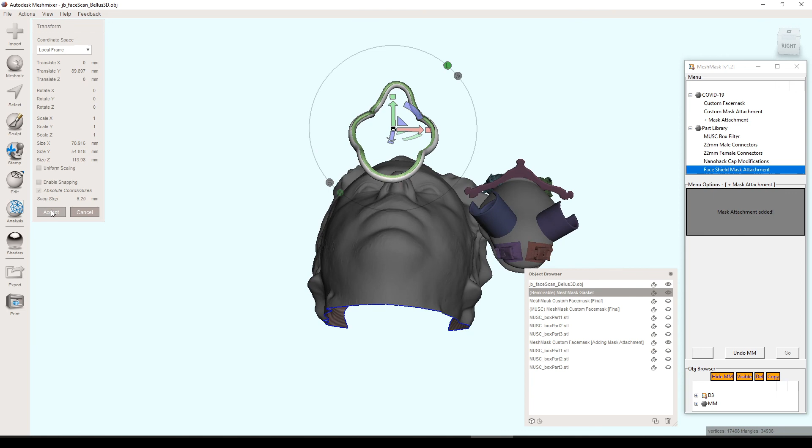Okay, so that about does it for the most recent version of MeshMask, version 1.2. Basically, at this point, like I said on some of the different posts on Facebook, this is a very flexible tool. It's at the point where no matter what parts come out, you can add them using this custom mask attachment workflow. And if you know just a little bit about what you're doing in MeshMixer, you could do all these things manually anyway. But this allows another subset of people to be able to do those things without knowing exactly what's going on in MeshMixer. So that's cool.

You can add any future parts that come out, or any existing parts that are there currently. There's several that are integrated within, but that's that.

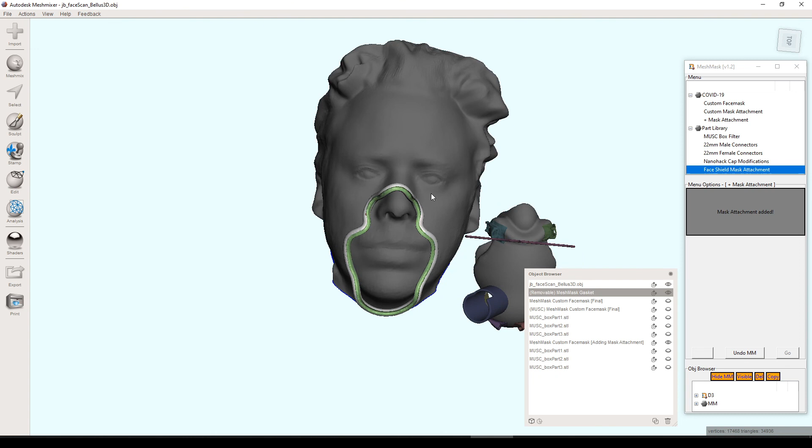Hope you enjoy it. I hope people have actually been using this tool, and I would love to hear some feedback if you have printed one of these out and used it yourself. What thicknesses, what offsets from the face work best? Have you noticed—one port, two ports? What I've been hearing is two ports is the best solution.